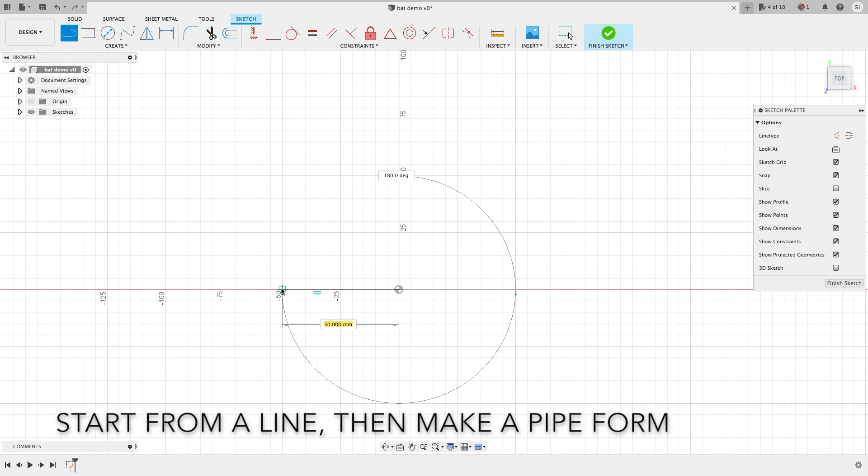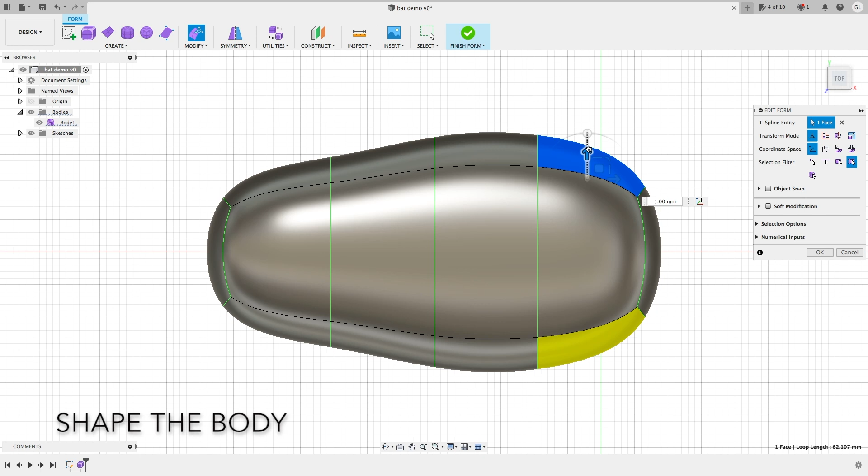Here we begin with the main body. First we draw a line and then create a pipe form from that line. Then I make it symmetrical, so when I shape the body I just need to move one side and the other side will be symmetrical.

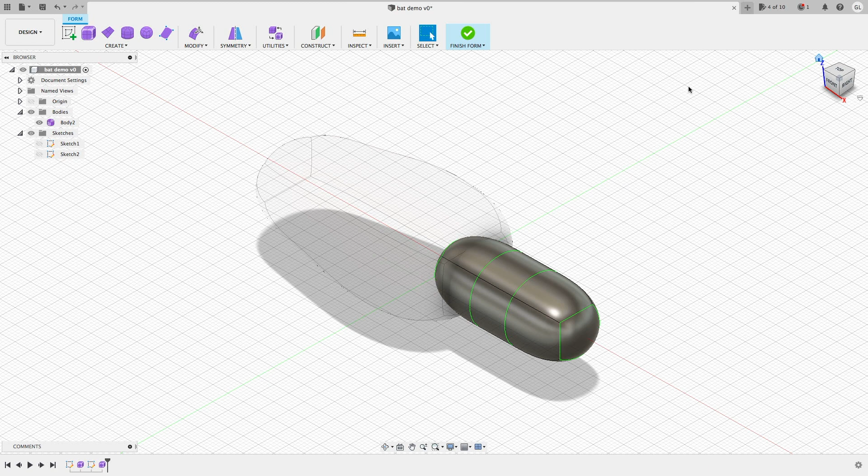Once I'm happy with the shape of the body, I move on to the head, using the same technique. This pipe form is very useful in terms of lure creation. You will see I use this technique over and over again in different lure design videos.

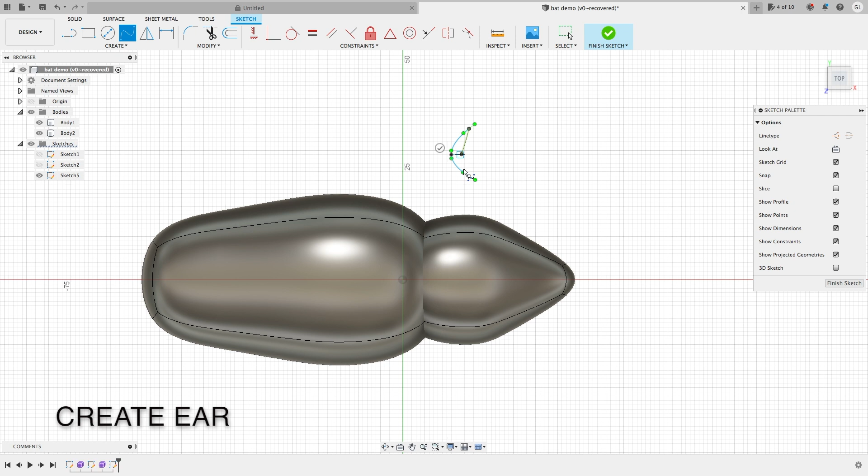Here I use a different approach to create the ear. It's similar to extrusion, but this loft method lets you extrude from one shape to another along a specified path.

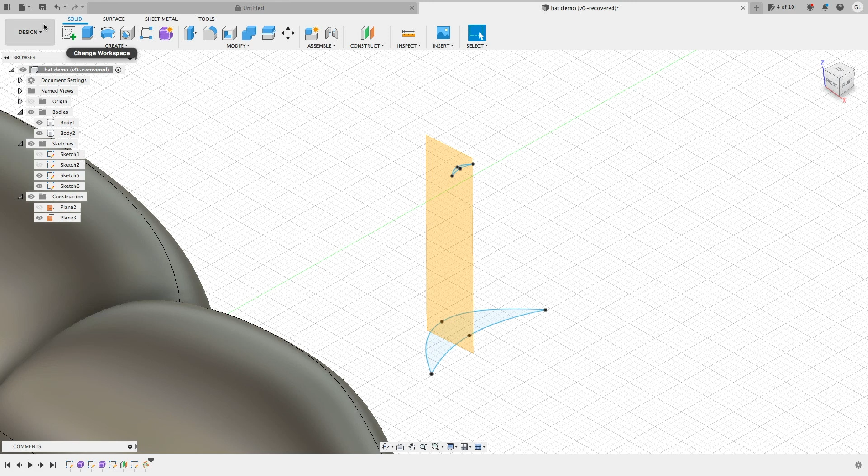The trick here is to create the profiles on different planes. You have to create the offset planes based on the first plane, and then create a vertical plane so you can draw the path for the loft process.

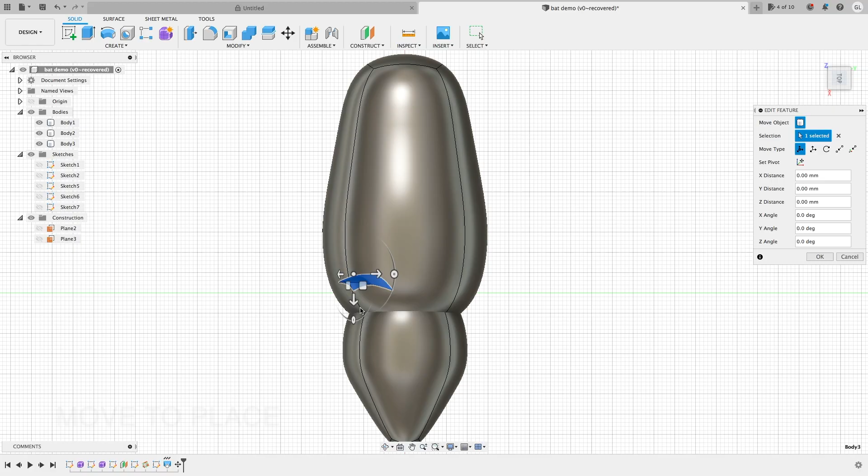Once the ear is created, you can move it around. Also, you can make it bigger by using a scale.

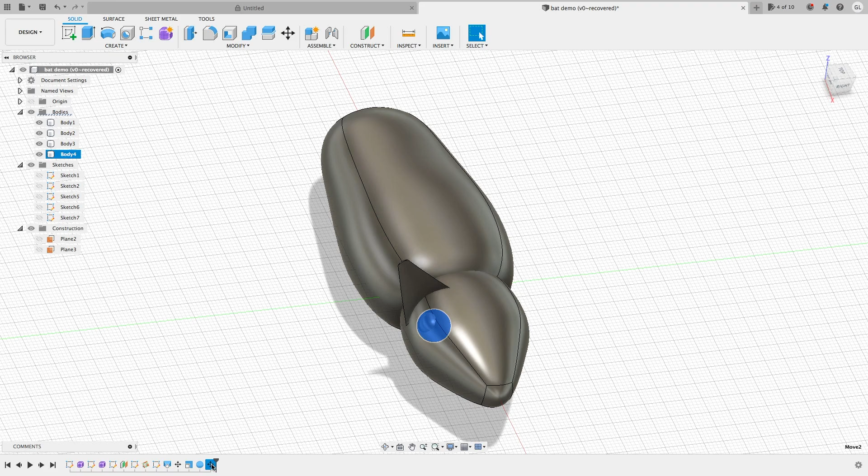Create the eye using a sphere. You can see I click the history to change the size.

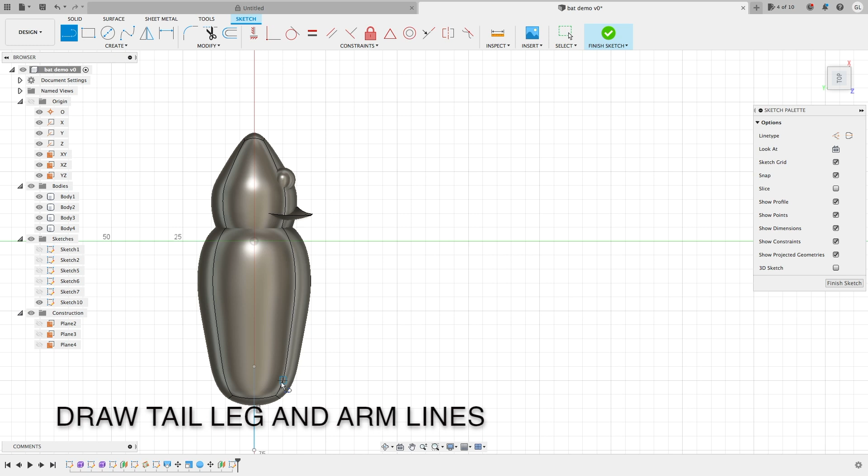Since this mold will be an open pour mold, I designed the bat to be upside down in the mold. Here I create an offset plane so I can draw the wings on that plane, which will be the top of the mold.

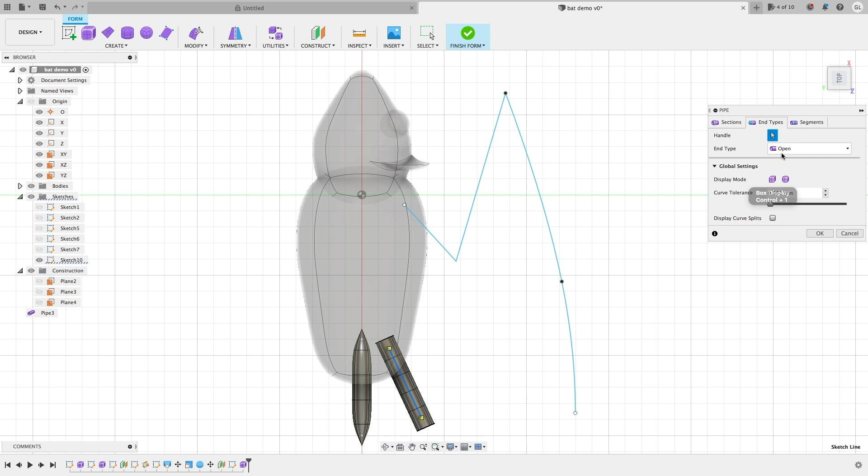Pipe form function again. You can see I draw everything on one side because later on I'm going to use the mirror function to create the other side.

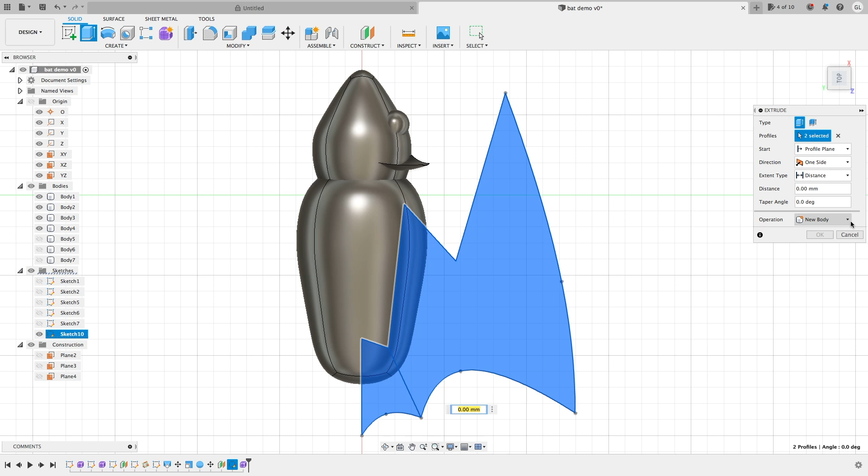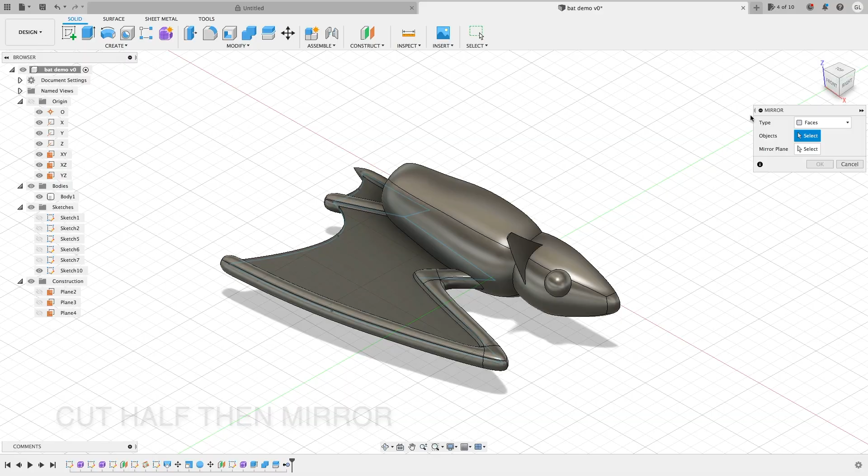Now that I have everything created on one side, it's time to create the other side using the mirror. Here's the bat.

Now it's time to create the mold box. What can be more appropriate than an oval shape?

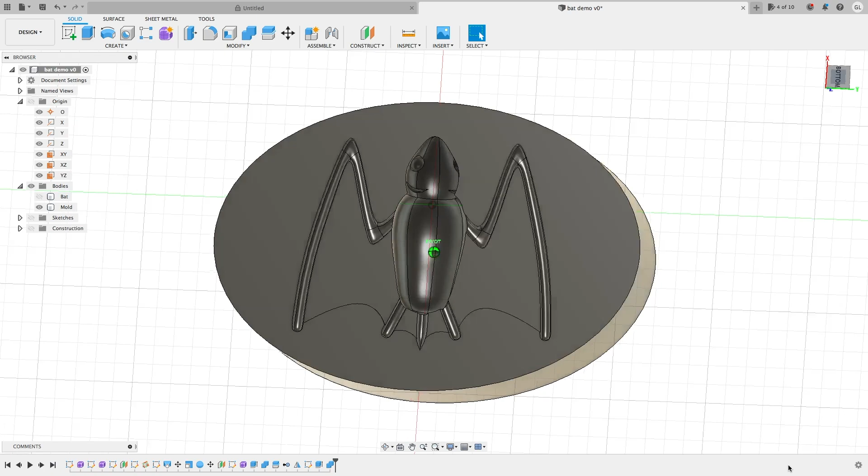To increase the buoyancy of the lure, I inserted a piece of foam so it can float better.

A little bit of flashing, but I can cut it, no problem.